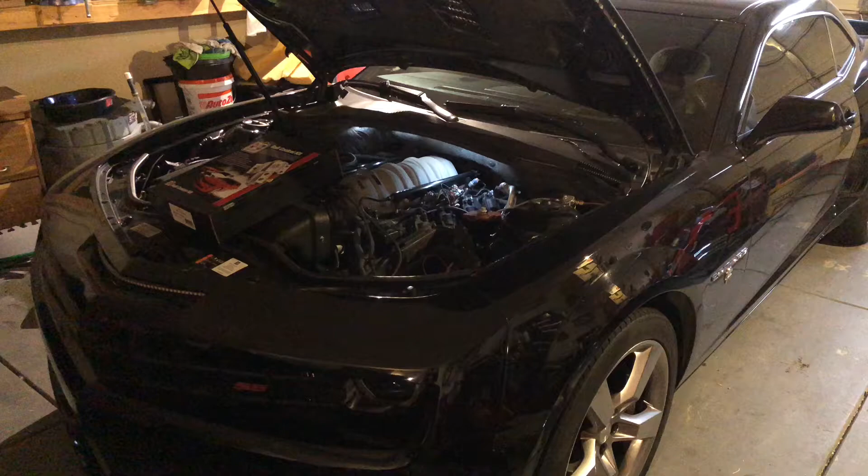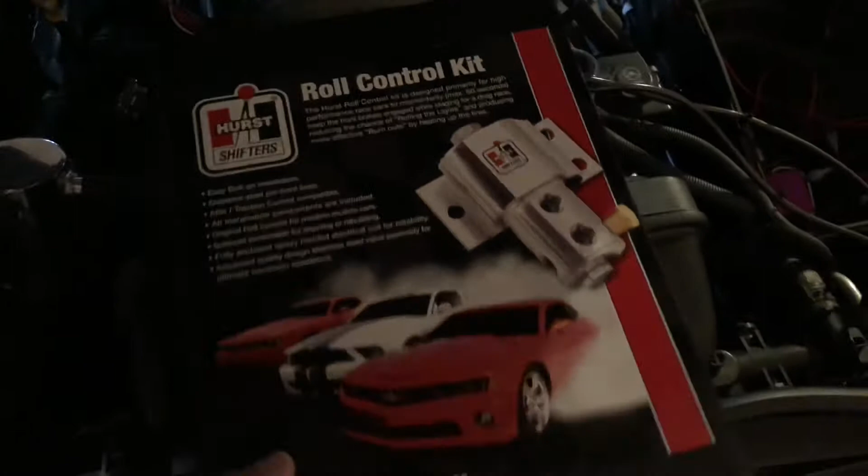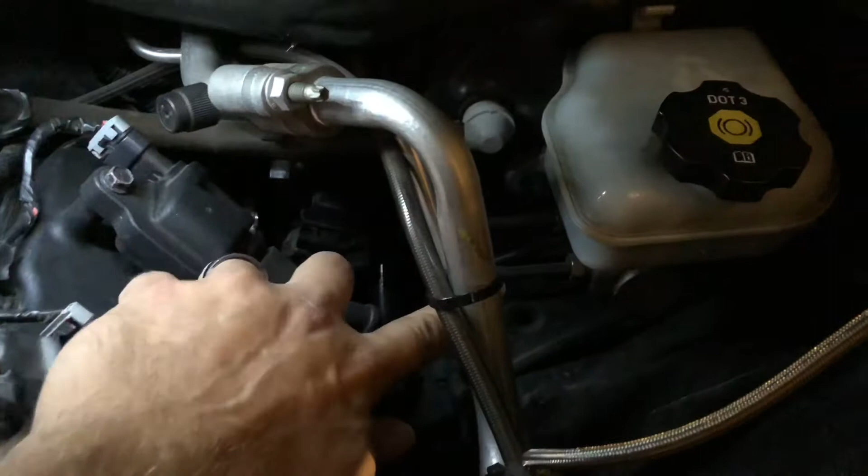Okay, so today we're going to be installing roll control by Hurst. This is a direct bolt-on kit. This kit number is seen here. Has everything you need to complete the install, and all it's going to do is tap right into these lines, which are your brake lines here, and it's going to basically allow you to hold pressure in the front and burn up your back brakes during burnouts.

So here's what you get with the kit. Your kit comes with your instructions, which at a quick glance look really good, so I like that. Makes it really easy. And all the parts you're going to need. And basically I'm going to walk you through the process here.

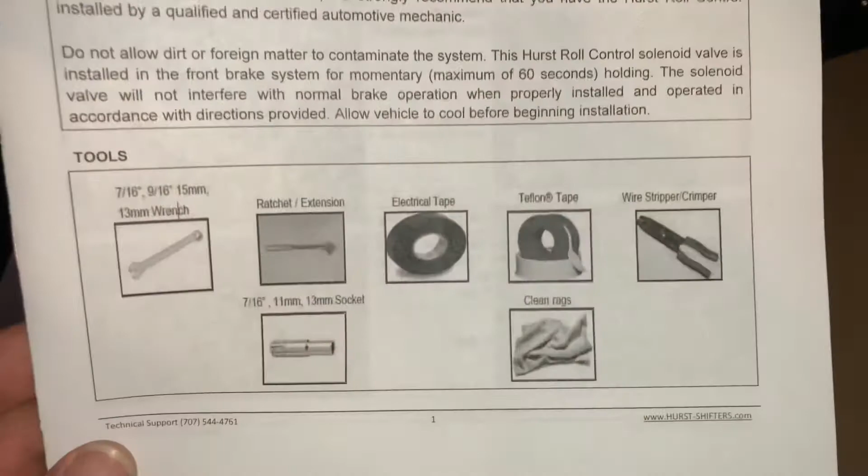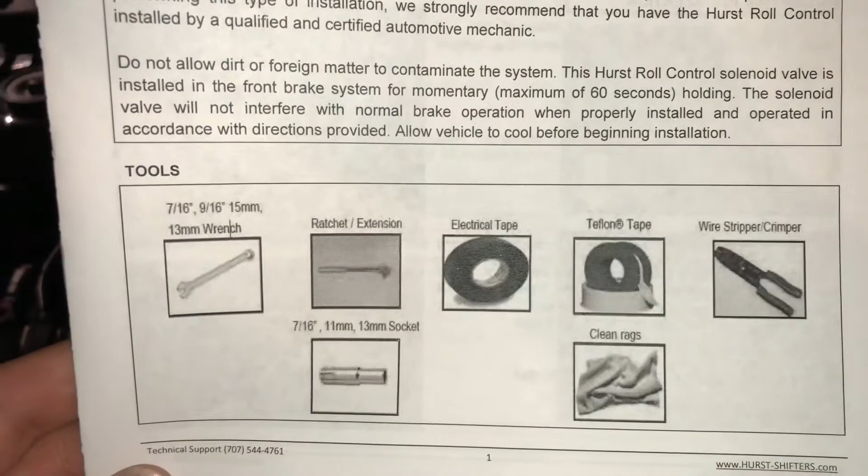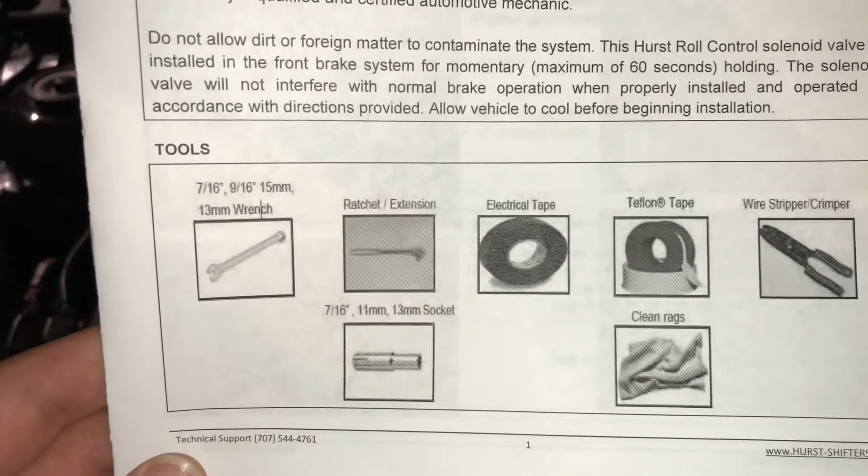All right, so the first step is we need to get some tools together. So as you can see, you need a couple wrenches, a 7/16, a 9/16, a 15 millimeter and a 13 millimeter. You need a ratchet with an extension, some electrical tape, some Teflon tape, some wire stripper crimper, some clean rags, of course, for the cleanup, because you do not want to get brake fluid on your paint. You'll peel it right off. And then a 7/16 socket, 11 millimeter socket, and a 13 millimeter socket.

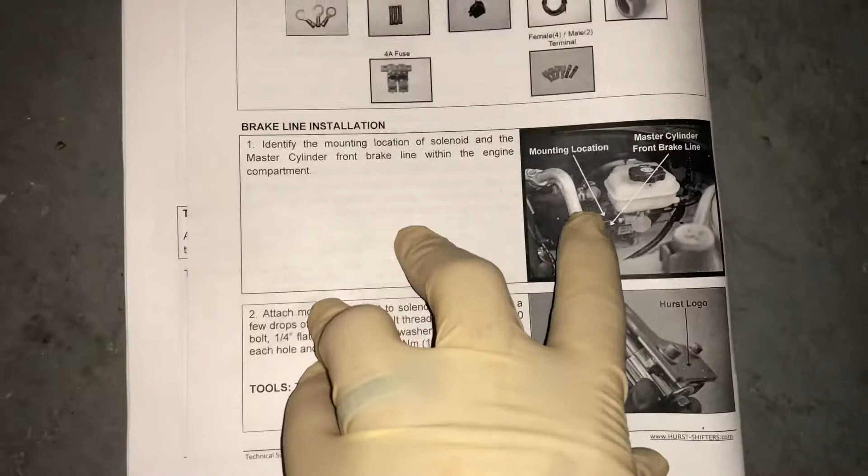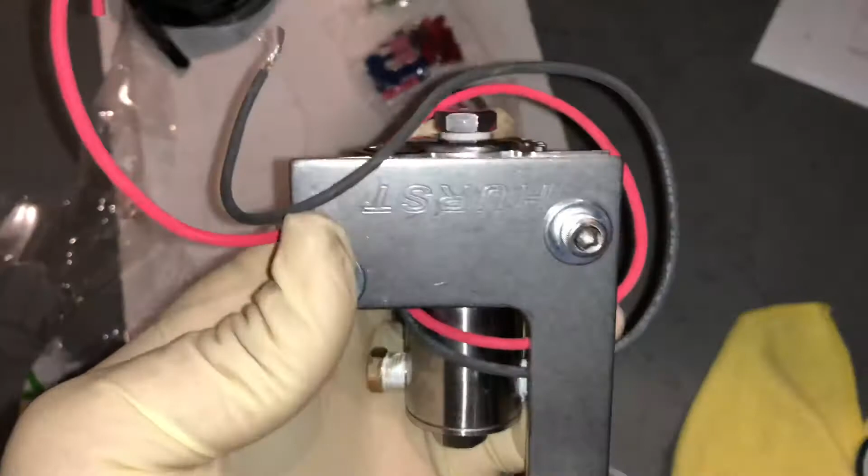All right, so we spoke about the location where we're going to put the unit, where it's going to mount. It's going to mount on one of the studs here. We're going to have to remove a 13 millimeter nut, and we can mount it to the stud. And then we're going to assemble the unit. It's very straightforward here. We're just going to take the bracket, exactly how you can see. The Hurst emblem needs to be up.

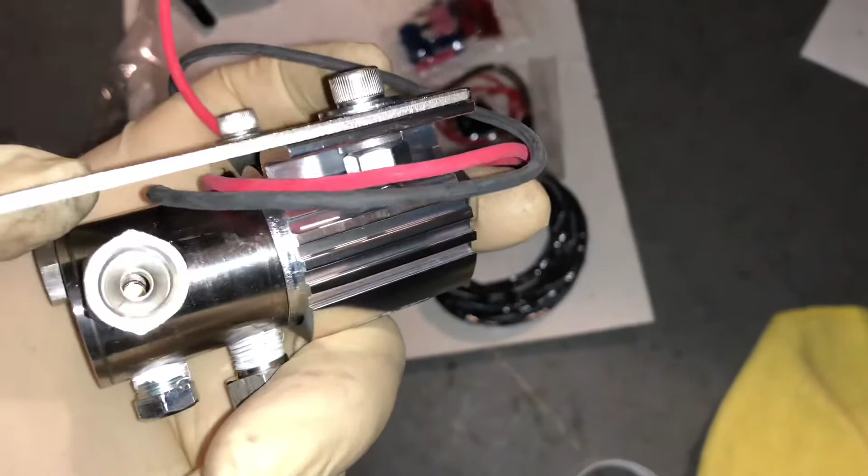And then you have your hex nut, then you have a washer, then you have a lock washer, then you have a nut at the bottom there. When you lock this down, you want to put some Loctite on this. You don't want this coming loose, but this is the correct orientation, the way that we want to see it. Also, we're going to start to install the bungs here. This is going to be the adapter for the brake lines. So they're going to be here and here.

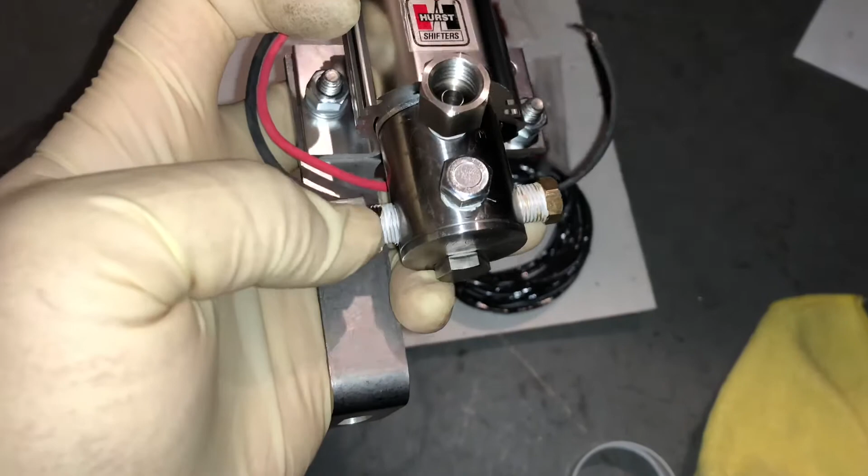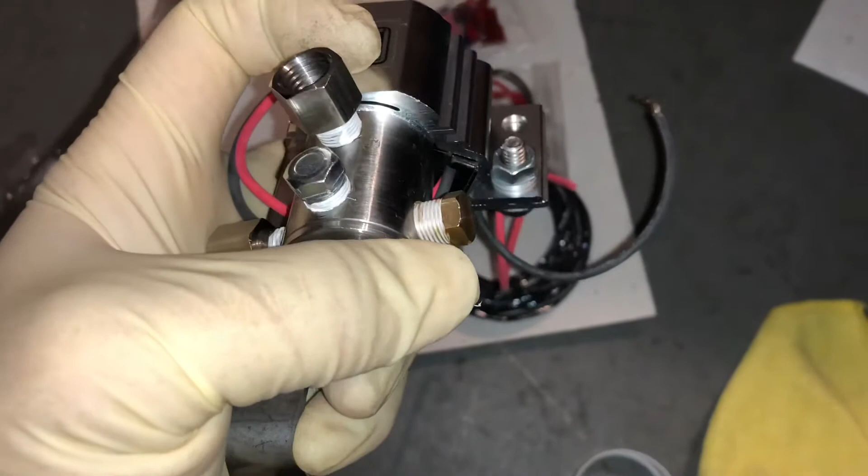You want to use just enough thread sealant, or Teflon tape, in order to seal it. Just one wrap around, no more than that. You do not want that getting in your solenoid. Then we had some plugs. This will be this plug here and this plug here. Again, same thing. Just go ahead and tighten it down until it's nice and firm and in there. And just one go around with the Teflon tape will do the job.

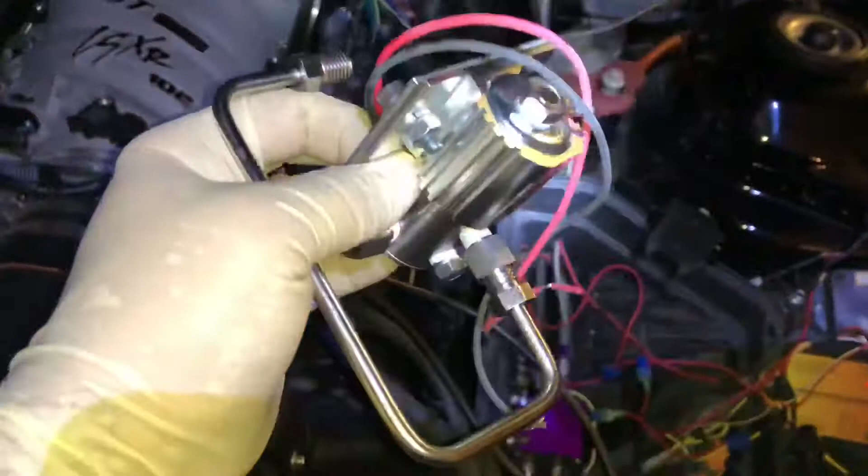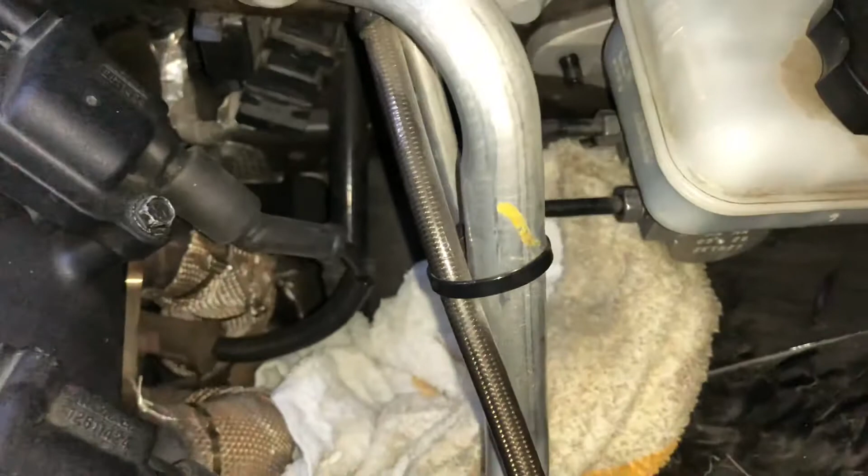So now that we have this assembled, okay, so we're now under the hood. And we're going to begin to very lightly bolt this in. I mean, very careful. We're going to loosen up the nut back here, which I already did. You want to use the right tools here. It says you can use a regular tip. I use a tube wrench because you don't want to round these off, otherwise you're going to make a very fast project into a very long one.

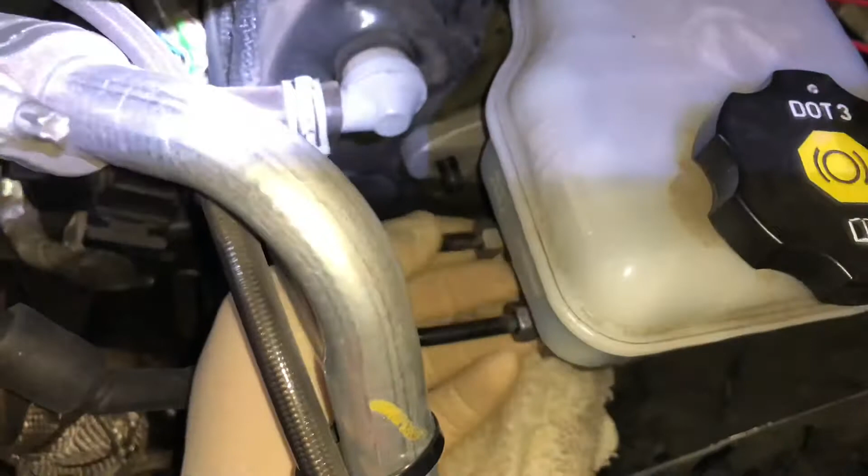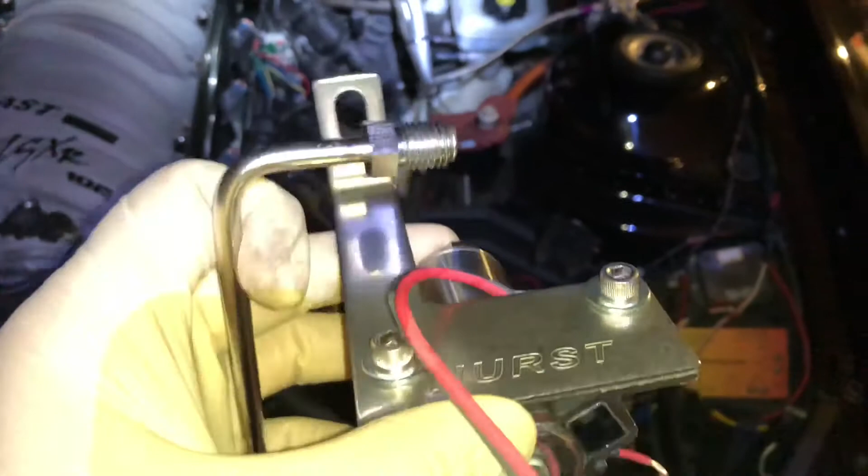When we loosen this up, it doesn't leak a whole lot of fluid, but put a towel down here anyway, just to be safe. And then after we get it ready to pull off, just going to loosen it up here, we're going to fit the bracket onto here. And then we're just going to test fit everything. So basically we're going to slide that onto the stud there, go ahead and put the lines in. This line will go into the master, this will go into the line that leads to the ABS block.

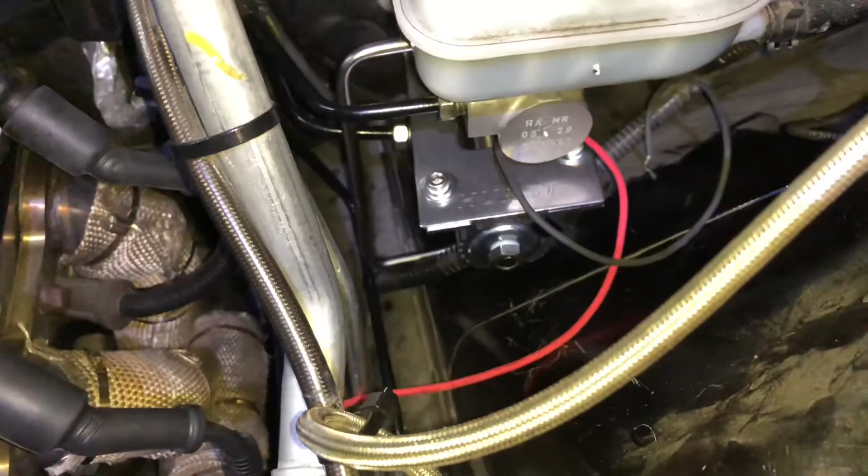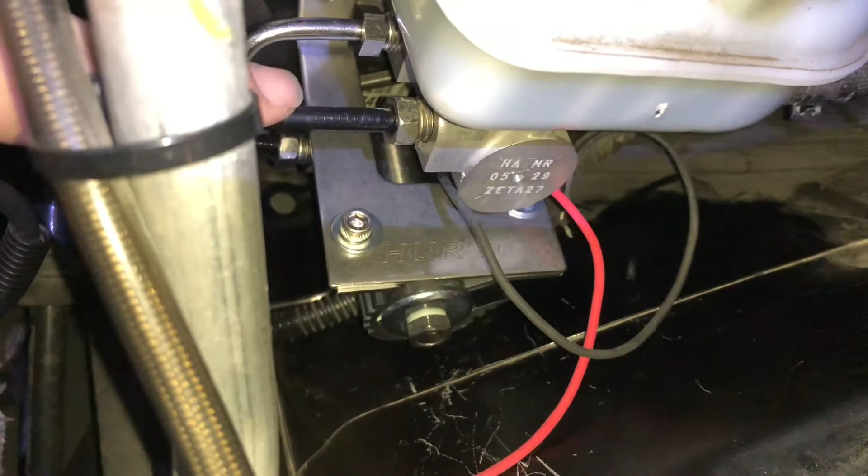Okay, so I got it installed here, and I'm going to warn you guys, it's not easy. So move everything you need to get out of the way. I removed the 2 spark plug wires just to give myself some clearance. Again, you do want to start that bottom one first, because if you don't, it's impossible to get it on after the fact. So start it there, then start the one into your main. So it's right down there. Your main line for the ABS.

Start it, and then put this one in. And again, you're just starting, you're leaving it loose. Then crank them down until they're just about seated, and then bolt that bolt in back over there. And then tighten everything down. Sounds really easy, but chances are it's probably going to take you about 45 minutes, to be honest. Take your time, take a break if you get mad. It's not worth breaking anything. And we'll move on to the wiring now.

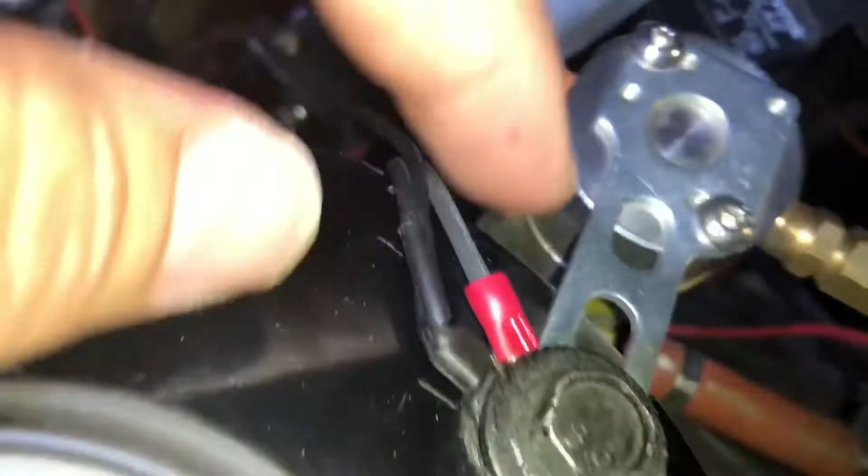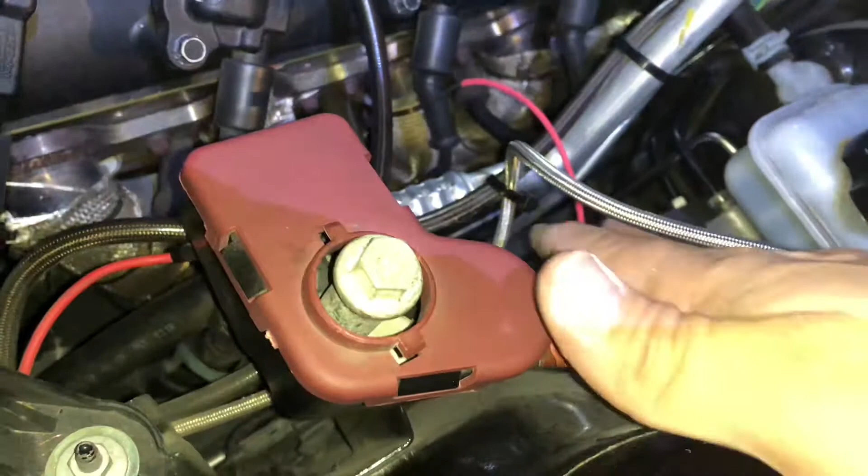All right, so the first part of the wiring is we're going to take the black wire here that's coming off the solenoid, and we're going to use the fisheye little adapter and put it to a ground. Right now we're going to use this as a temporary ground. We know that's good because we're going to take the cap off the battery here, and we're just going to test it to make sure that this solenoid is working. That sound means we are all good, so we can move forward.

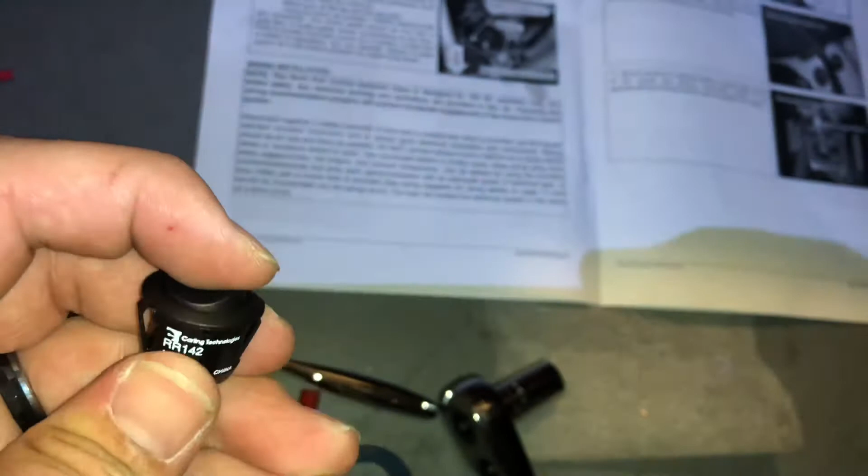Got a couple switches here. Here's what I recommend doing. Just go ahead and put the fitting onto this switch here, and then you have this switch also. And then we'll mark right now which side I'm going to put the positive and which side's going to be my arming, and then that's going to hook to here.

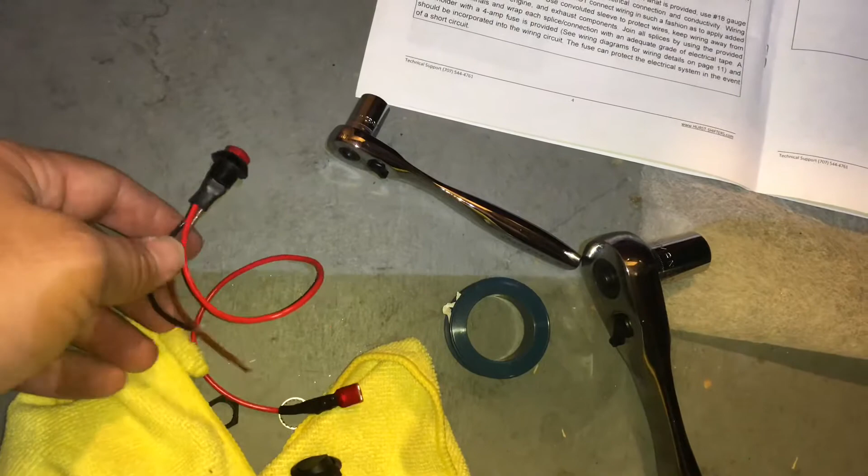Doesn't give you the sizes. I'm going to drill it out right now. I'll let you know what the sizes are when you mount this thing, and then we'll go from there, guys. So I didn't really follow the wiring or detail the wiring, because I didn't want to get demonetized for all the cursing.

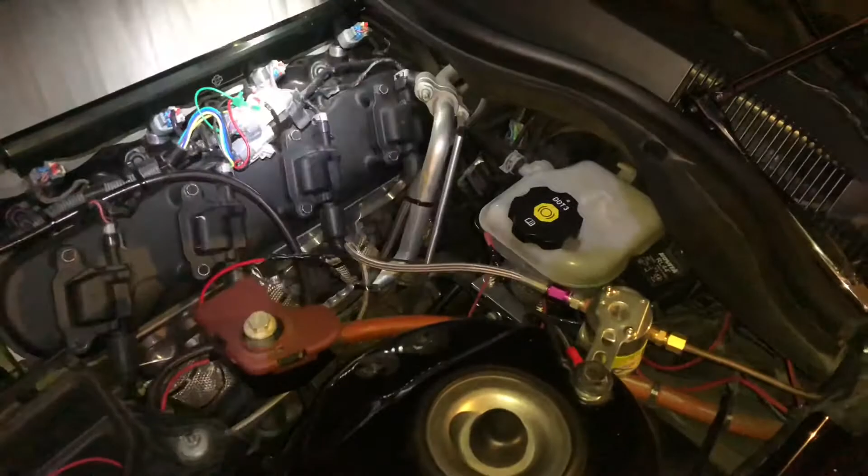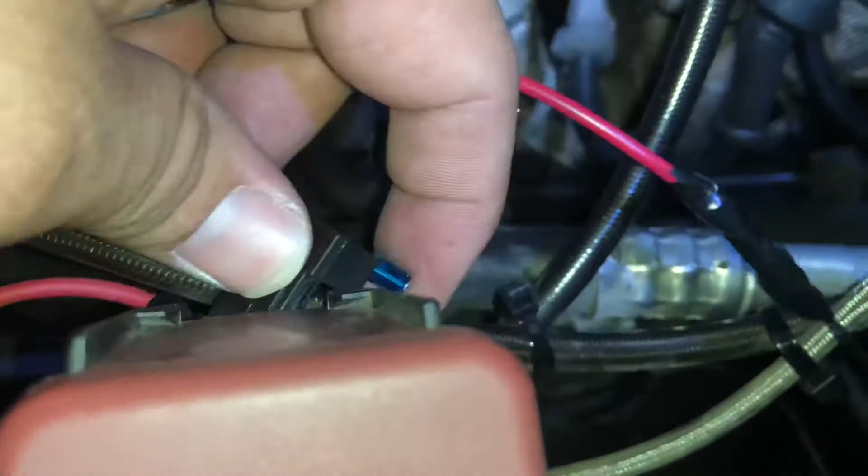So anyway, 12 volt. You can tap in right here to the main 12 volt, fuse it off. I already had a line going into here, so I just tapped into that and then ran the wire through a small grommet. You can probably see down there. I already used it for a couple other. I actually drilled that one and put a grommet in there for other usage. You're going to run two wires out. One's going to be going to your 12 volt. The other one's going to be ran here going to your Hurst.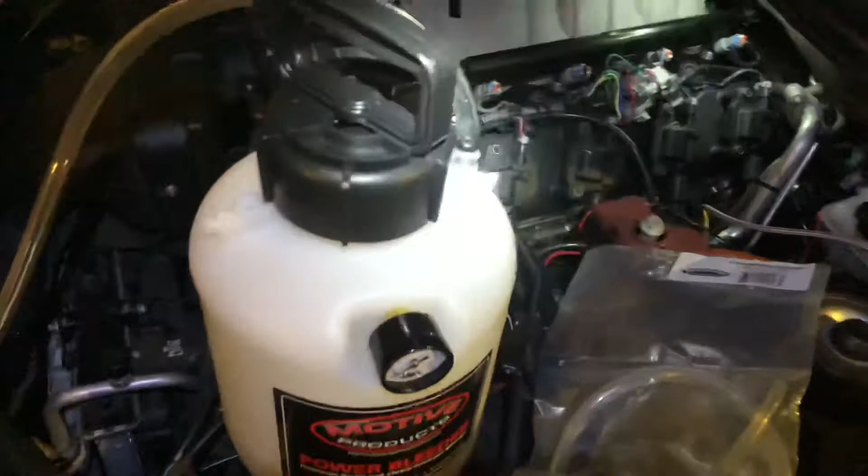Now I'm going to move on to bleeding the brakes. Well guys, you have a couple options for bleeding the brakes on the Camaro. You can either take it to a shop and have them bleed it, probably charge you, from the last quote I had, $140 to $180 out here in California, maybe less elsewhere, because you do need to force fluid through the system to get it through your ABS block, which is over there. If you don't get to the ABS block, you'll just have air bubbles.

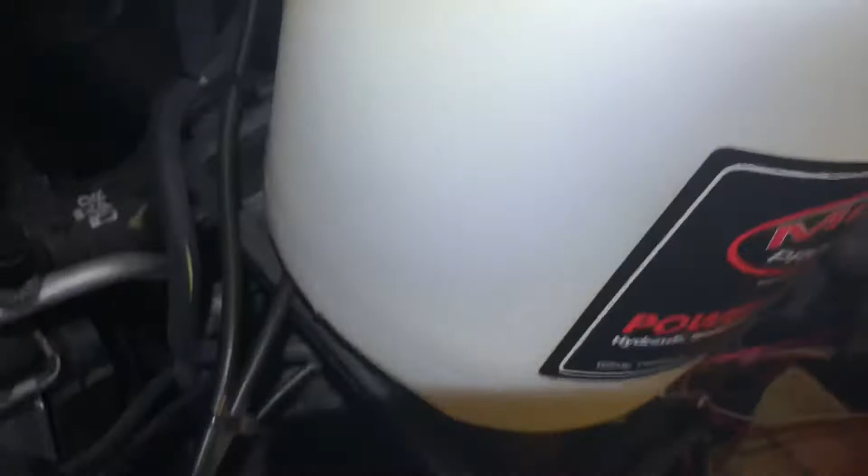So what I have here is the Motive Products Power Bleeder, which is a beautiful thing. You just fill it with fluid. This is the 4-quart model. I put 2 quarts, but I'm gonna put about 1/4 in there right now. It has a quick connect, hooks to a fitting that will hook directly to the cap. You keep fluid in the cap while it pumps directly with the system. The GM adapter you need is the 1108. That's what I got here. So I'm gonna hook it all up and show you how to work it here.

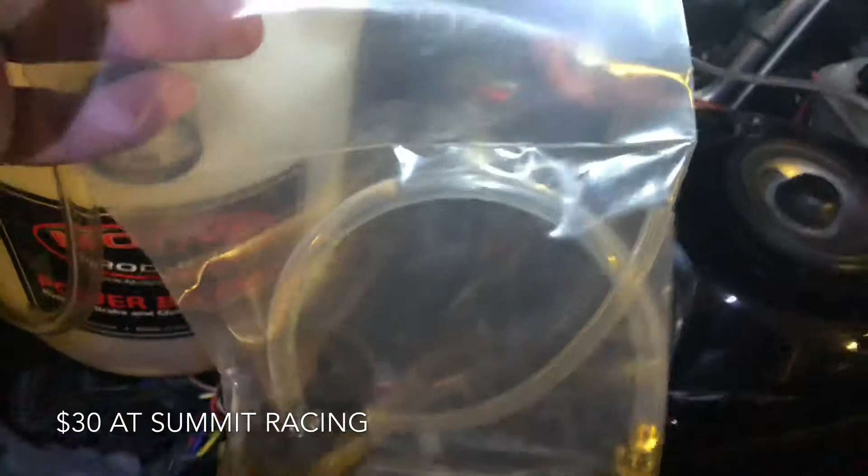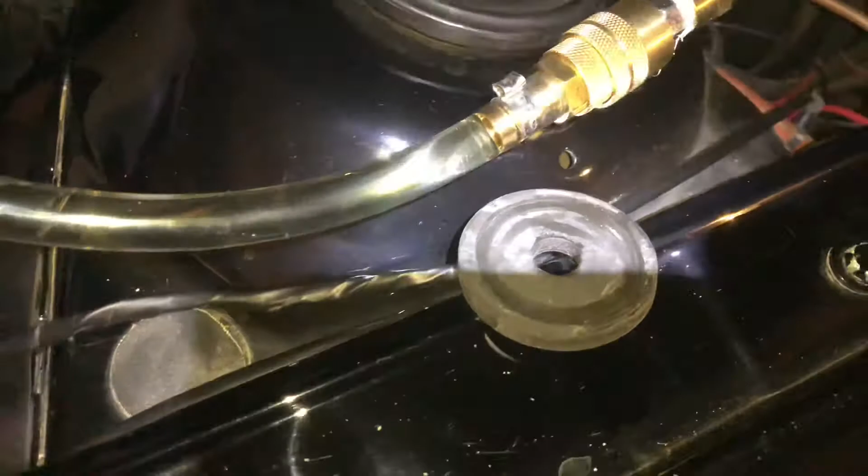Okay, so we just went ahead and hooked the system up. Hook the cap up. There's 2 fittings. You want to use not this one. This one's really thick. You want to use the gasket. It's a little thinner. Also, it doesn't come with a quick connect, so I had to grab one out of my air compressor kit for the quick connect here. And then you just want to pressurize to about 10 psi. Make sure it holds. It's holding. You have a little bit of air in the line. It's not a big deal. So now we can go start.

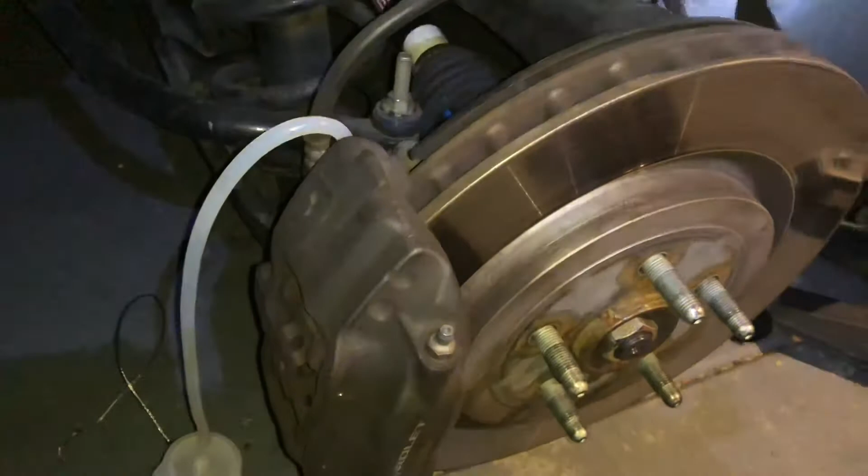If you just did the front brakes and release that line, you only have to bleed the front. But because I have a lot of dirty fluid in the system, I'm going to flush the rear and the front. Now that we've verified that there's no leaks in the front there, we can increase the PSI to 15. We have 2 bleeders here, one in front and one in back. Starting with the one in back, we'll release it until the fluid stops blowing bubbles, and then we'll do the front the same way, and check the pressure to make sure we maintain around 10 to 15.

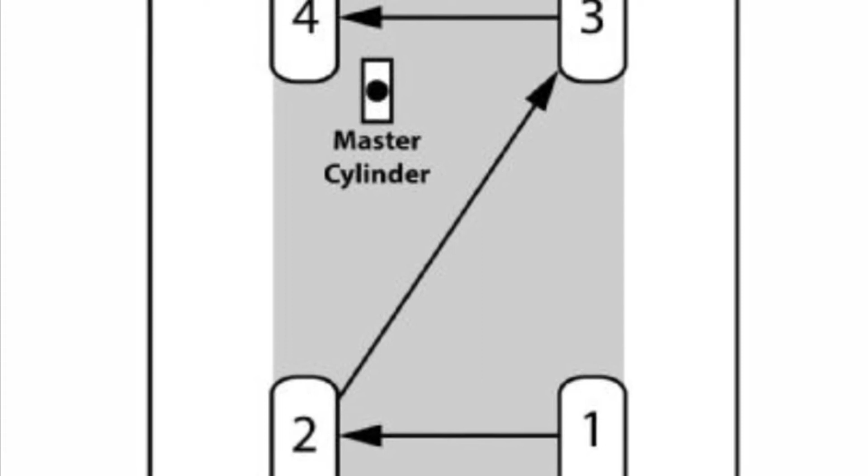Alright, so went ahead and bled all the brakes. One important little feature I need to let you guys know is 10 psi is about all this master cylinder will take. I did put 15 in there and it just turned into a giant freaking mess. So 10 psi, that's all you need. Bleed both sides of the Brembos if that's what you have on your car, if not, regular calipers. After you test drive it, you just want to take a look, whichever you checked.

No leaks anywhere. Everything looks good. Fluid level's at the good level where it's supposed to be. And right now it's dark. We're working in the midnight hour. So tomorrow I'll do the payoff and show you how everything works.

All right, well, time for the payoff here. So to activate this deal, just go ahead and turn the switch on. You see the light kick on. Then you're going to push your brake down as hard as you can, and then you're going to hold the button. Now the front brakes are locked on. I'm gonna just put it in first here and just pop the clutch.